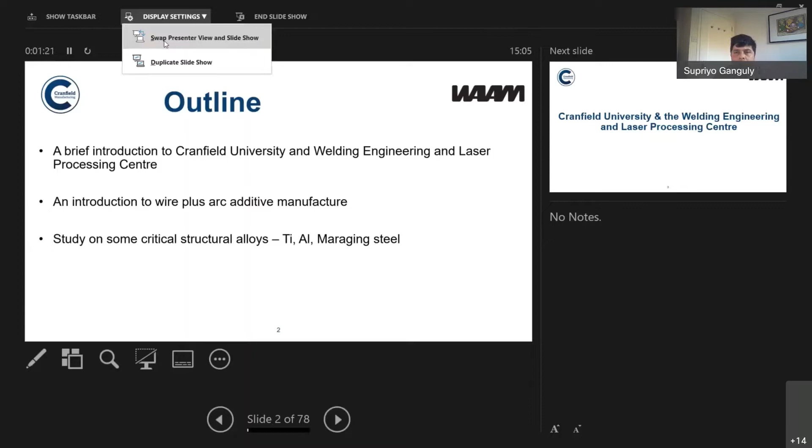Dr. Ganguly, would you mind changing the display settings a bit, so that only the main slide comes up? Great, okay, great, yeah, good, great. Please go ahead. Thanks very much.

The main point I was trying to say is that titanium was being researched for a while now, whereas slowly the importance of this particular manufacturing route is understood in all different sectors, realizing its potential. I will give some glimpse of the work we are doing in aluminium and high strength steel, like maraging steel and others.

Firstly, I will talk a little bit about our university, which is located about 50 miles north of London. It is in a strategically very nice location, in the 'skill corridor' between Cambridge and Oxford, defined by the present UK government as the area where there will be a lot of activities in terms of high or advanced technical research. So we are located in a strategically very nice place.

A slight introduction to the history of Cranfield: originally it was a Royal Air Force base after the Second World War, and it became the College of Aeronautics in 1946. A picture from that time is shown.

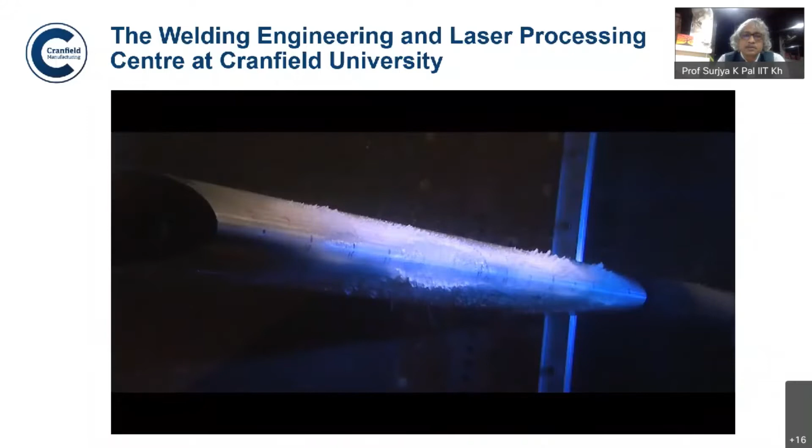So this gives you a basic glimpse of what we do. I hope the sound was audible.

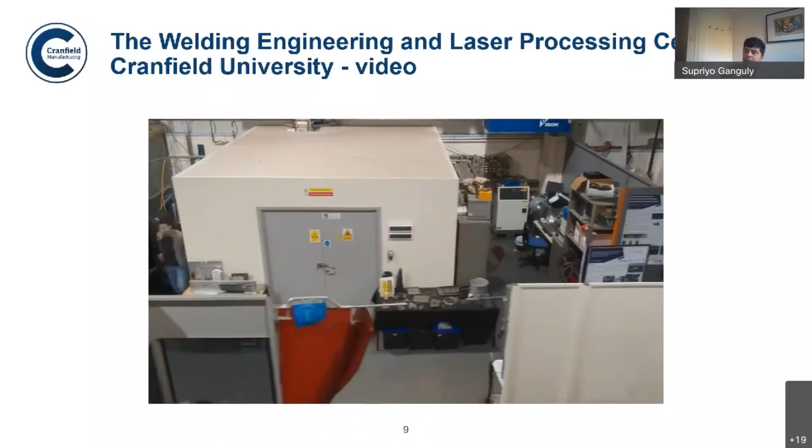So a basic glimpse of the lab. This was filmed by a student using his drone, just to show you the scale of the lab we have. This lab is situated over 700 square meters and is completely open architecture. It's not like we have some particular instrument we use to produce research in one direction, but we set up and manage to do things as we need, depending on the project.

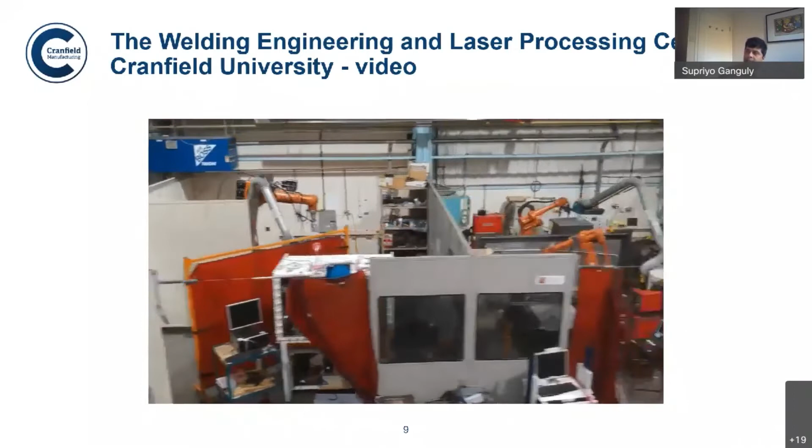In the area of arc welding, laser welding, and wire plus arc additive manufacturing, we are really internationally leading at the moment because of this huge facility, and that brings us very close to industry because we allow doing stuff at a level where industries feel very confident or comfortable.

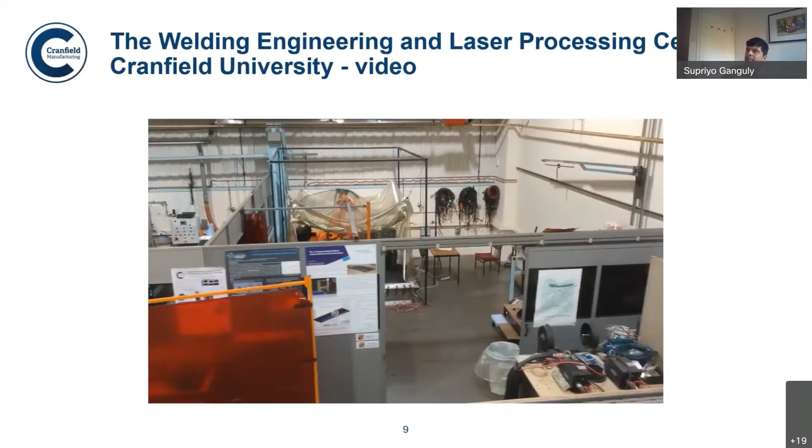So this is a brief introduction to our lab, and now I will start talking about wire plus arc additive manufacture. This is just comparing with what people do conventionally, the sculpting concept. Normally or traditionally, complex parts and shapes are machined out from a block of metal, whereas in additive manufacture we build it layer by layer. This gives us enormous opportunity to save material and do things not quite possible in traditional manufacturing.

Now I will talk a little bit about metal additive manufacturing. Metal additive manufacturing has existed for quite a long time, and traditionally high power density beams are used, like laser beam or electron beam, with a variety of configurations. It can be laser plus wire or laser plus powder, and laser plus powder can be done in different ways, like powder bed or blown powder, and accordingly they have different names or terminologies.

Similarly, electron beam welding also can be done with powder or wire, and powder bed plus electron beam plus wire can produce very fast results—the productivity is quite high, which is known as the Sciaky process.

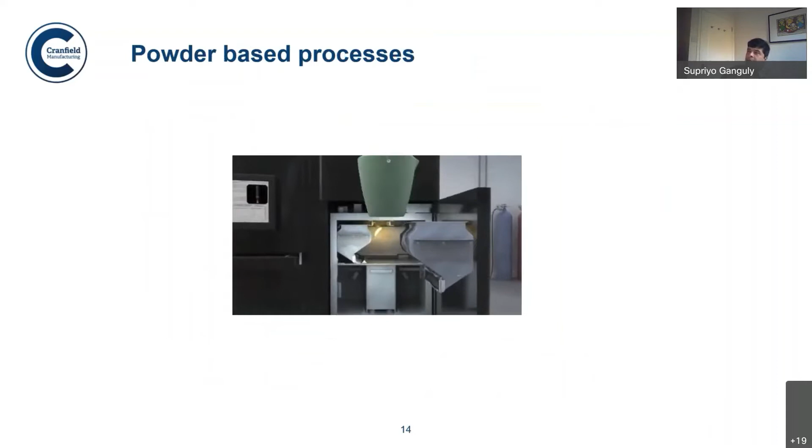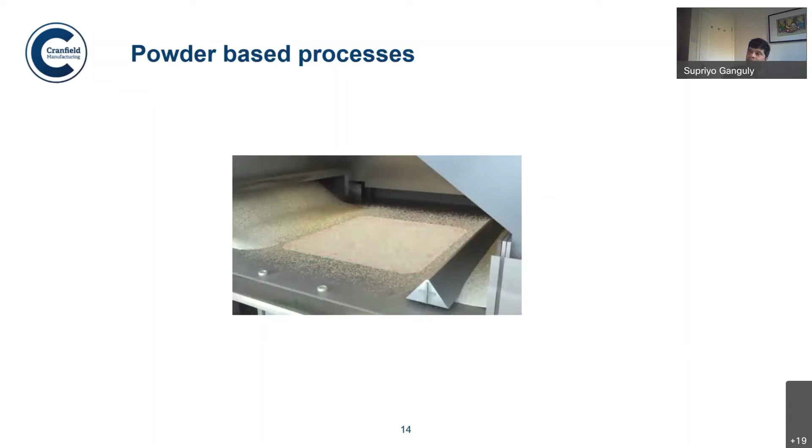This is an example of a powder-based process where manufacture of a turbine blade is schematically shown. You can see we have a powder bed, on which laser will be impinging or irradiating, and the powder bed will be lowered, powders will be fused, and slowly you manufacture what is known as a net shape component—you really don't need to do much machining when we generate such a component.

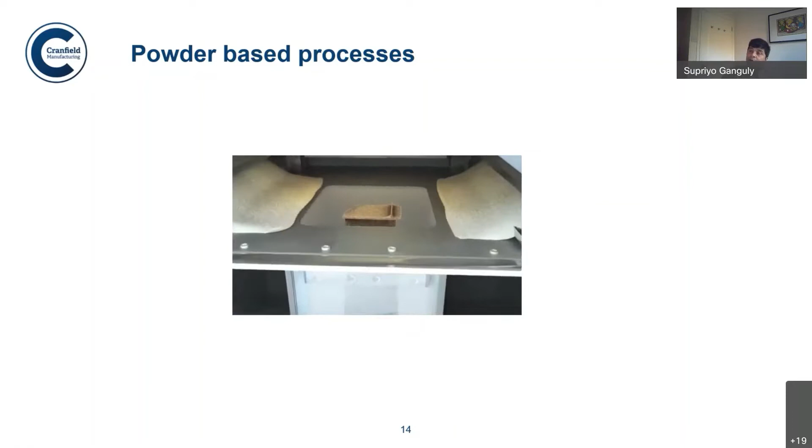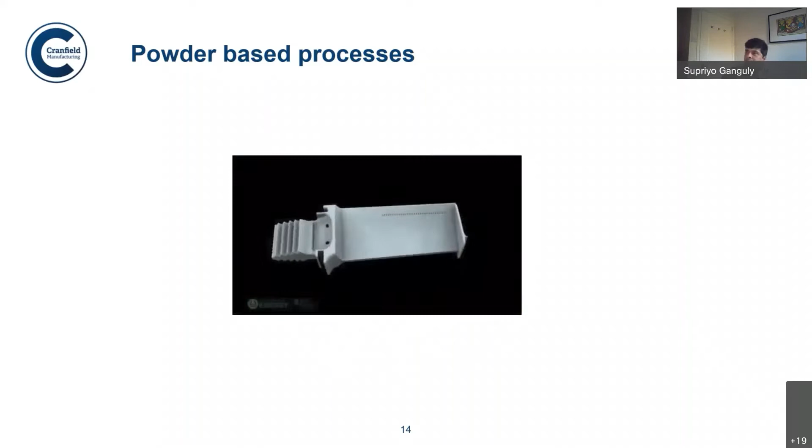So it creates a component which can be readily used. The material utilization can be quite high, although there is loss of powder during the process. After manufacturing, the product needs to be cleaned, where it will be surrounded by powders, and once the powders are removed, you have a net shape of a blade or any component that you are manufacturing.

In case of wire plus arc additive manufacture, it is slightly different. On the left hand top side, an animation is shown of an aircraft landing gear rib, how it is deposited layer by layer, with different strategies. The control of thermal stress is extremely important, and often we do things where the substrate becomes a part of the component.

As you will see on the right hand bottom side, we are not making two components, we are making one component, but we are flipping the neutral axis of the component in a manner that the substrate on which it is built becomes part of the main component.

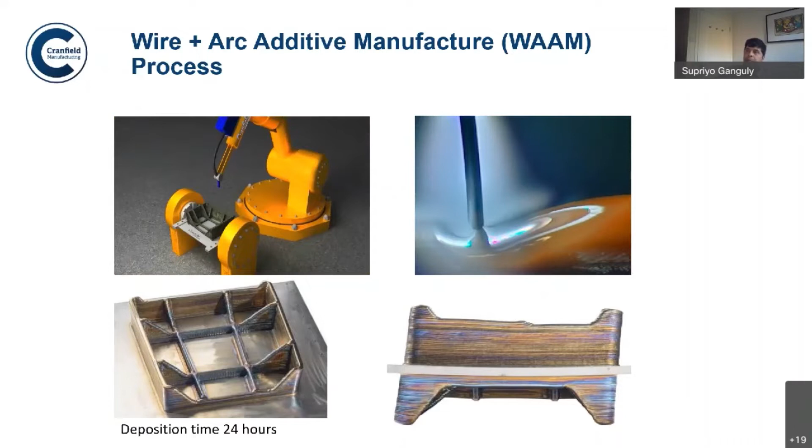On the right hand top side, a plasma arc is shown, how the material is fed, and on the bottom side you can see a proper component which was manufactured, made of titanium.

A lot of work has gone into understanding this process, and the next few slides will talk about that process. But before that, just to give you the scale of saving that you can do.

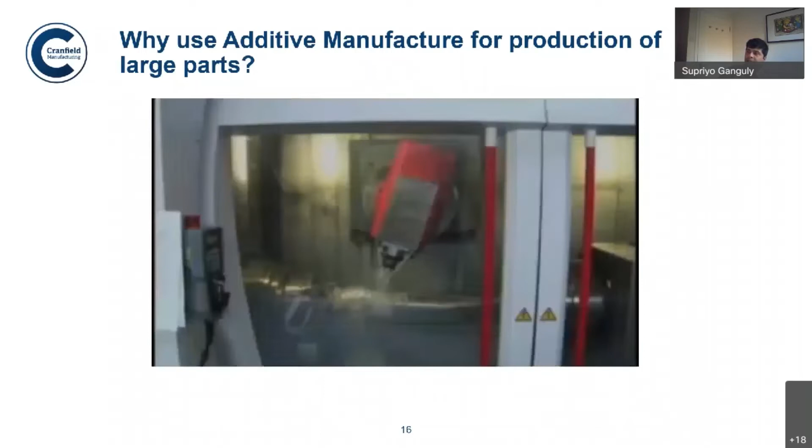In a traditional process with a billet and machining out all the material, it will be extremely expensive, because the cost of titanium can be quite high in its rod state, while the cost of scrap titanium is practically nothing. So basically, it's a huge amount of material saving that this manufacturing route offers, which makes it so attractive to all the high-end manufacturers where people use titanium.

And needless to mention, titanium machining is a very difficult process—it is not straightforward like aluminum. So from that perspective also, it is a fantastic process for titanium.

As I said, initially most of the research was funded by people who are planning to use titanium into their product mix and want to have a process which gives the best yield and lower material wastage.

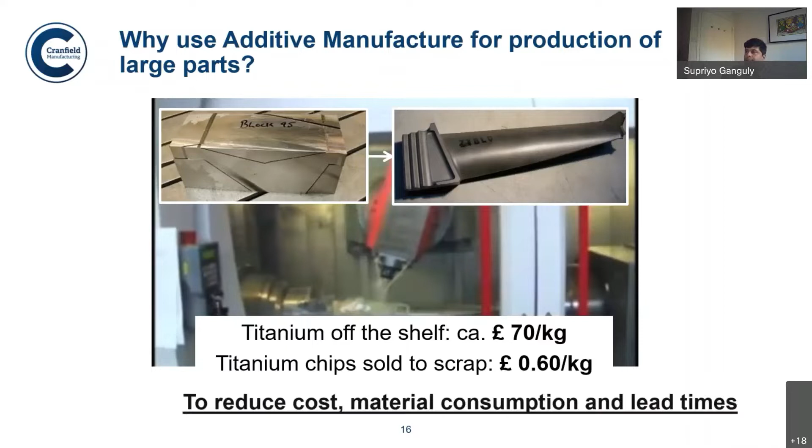So I will talk a little bit about the different structural alloys that we are studying now. Just to give a brief context, wire plus arc additive manufacture basically relies on successive deposition. As you can see in the components, we call it near net shape. It is not a net shape component because you need to do machining before it can finally be implemented.

However, the process itself results in several thermal cycles. When a layer is deposited, as we keep building, it will have several thermal cycles, and it would obviously depend on the geometry of the deposition and how much energy input is going through each layer. This will result in a differential thermal profile in a component, depending upon whether a layer was deposited at the beginning or towards the end. It will have quite different properties, which I will show you in some of my work.

Also, because it is cooling from a liquid state, it will give segregation of solute atoms, which will make it even more complicated for heat treatment, because for age hardening alloys, solutionizing is a step before we go to the aging process, and solutionizing might not be very smooth or uniform throughout the whole component if there is a lot of segregation.

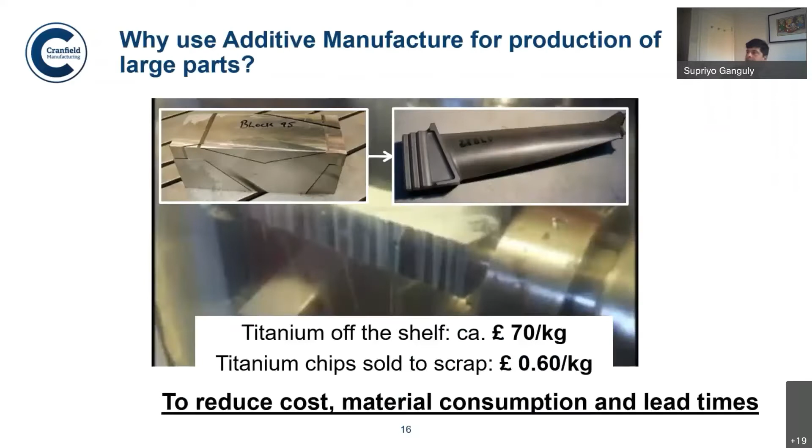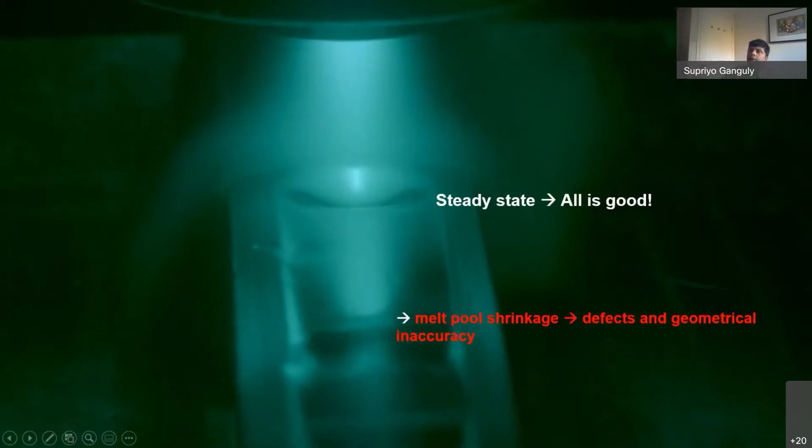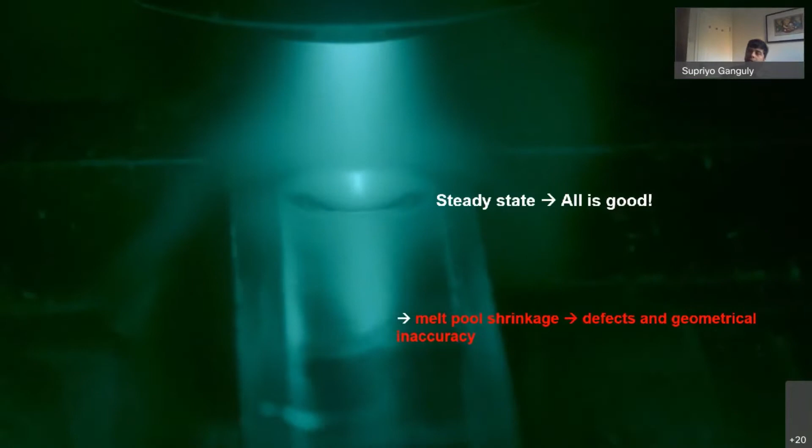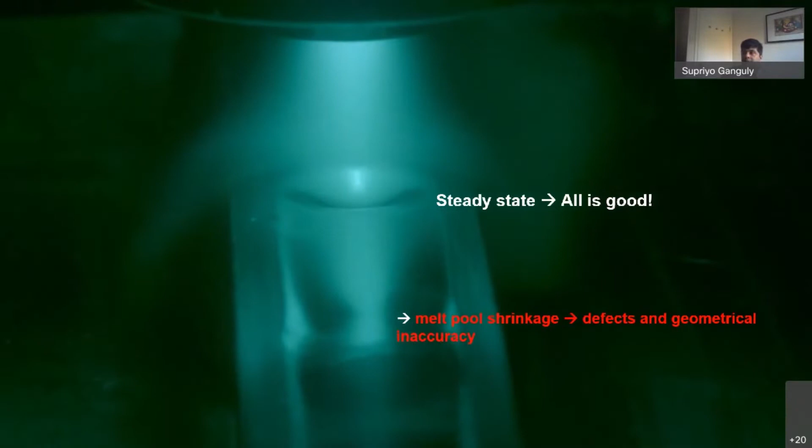This is an example of the process, showing how the weld pool changes when it comes to a junction, or a place where the thermal mass is very different. At steady state everything can be quite nice and good, but one of our areas of expertise, where we made significant progress, is understanding how to deposit when the thermal mass changes. As you can see, when the weld pool shrinks because the thermal mass is larger, it will definitely generate defects and geometrical inaccuracies. This is an area we are focused on quite heavily and studying.

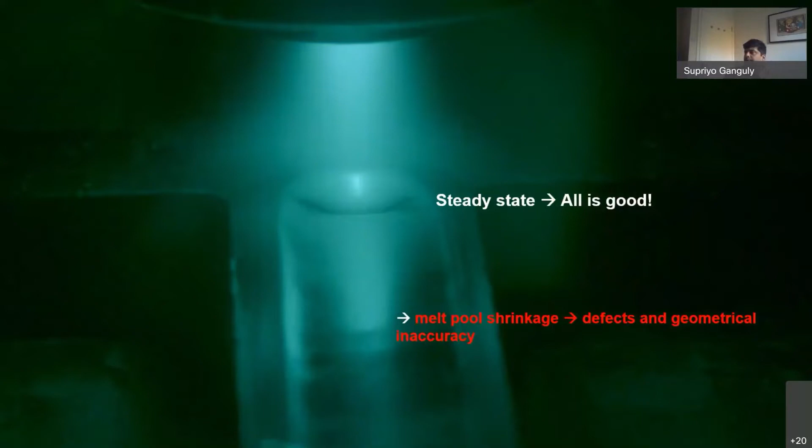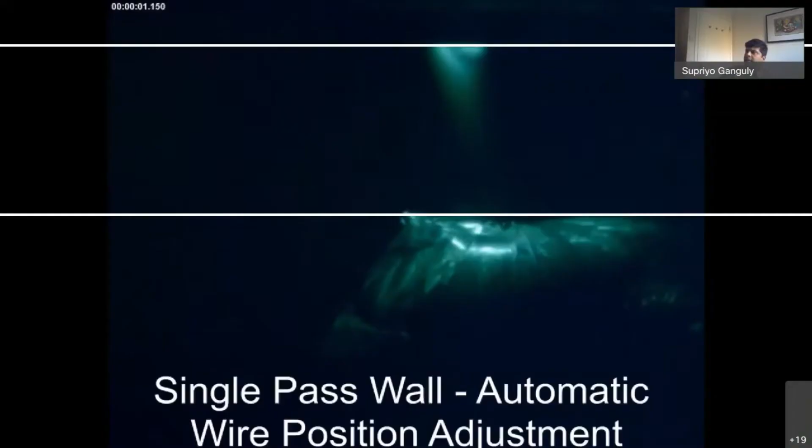This is a change in thermal field near the intersection, which needs compensation. This is another example of the work we are doing. This is a single pass automatic wire position adjustment. As you see, the surface tension of the weld pool changes as it progresses, and it is quite normal, because as it moves there is heat accumulation, and as a result the temperature of the weld pool changes. In this example, we are trying to show that we have developed processes through which the distance between the wire and the relative position of the wire to the arc remains constant throughout a deposition process.

So these are the different areas of process studies that we have performed, and generation of components really needs a very clear understanding in these areas.

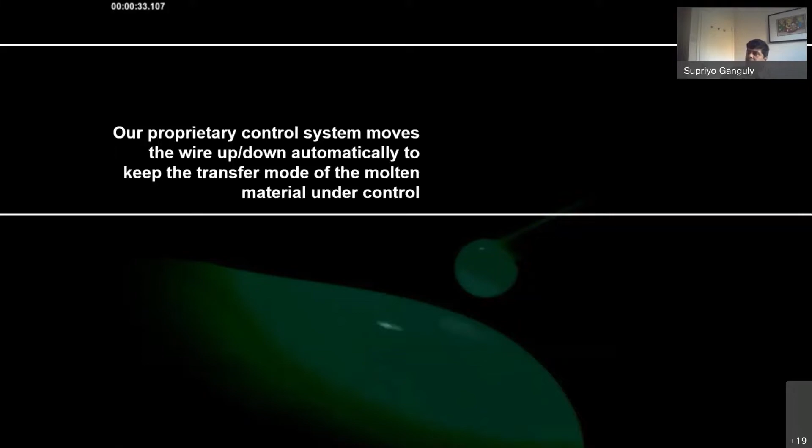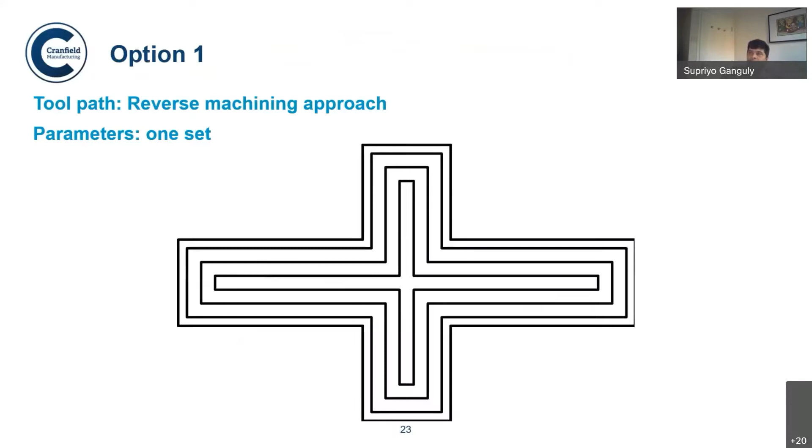This is option 1. It is just like a reverse machining approach. We start building from the middle, and slowly it goes out, using the same parameter set throughout. Now you can see the component, which is completely riddled with defects, and the layer height is completely inaccurate.

It is because the thermal mass of the depositing mass is continuously changing, and unless this is addressed, it will never be able to generate a structurally sound component.

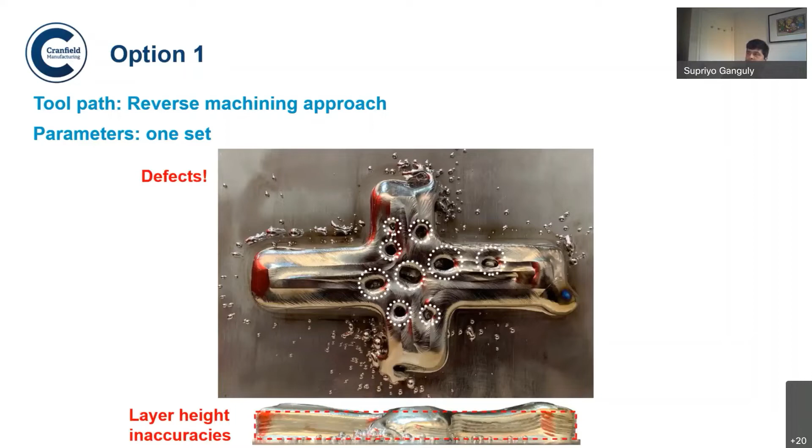Now this is the other part, the final part building, which was done here, where we managed to rectify all these defects and all the resulting parameters and defects.

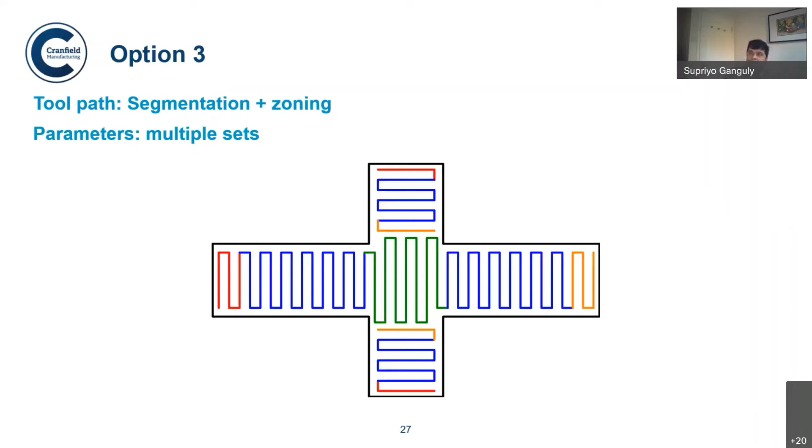Here it is showing segmentation and zoning in the toolpath. The different colors show that the speeds are changing, and multiple sets of parameters are used. Once this was done, it managed to create a completely sound cruciform with target layer height in every aspect of the deposit.

However, the thermal effects can still be seen at the edges, as you can see here.

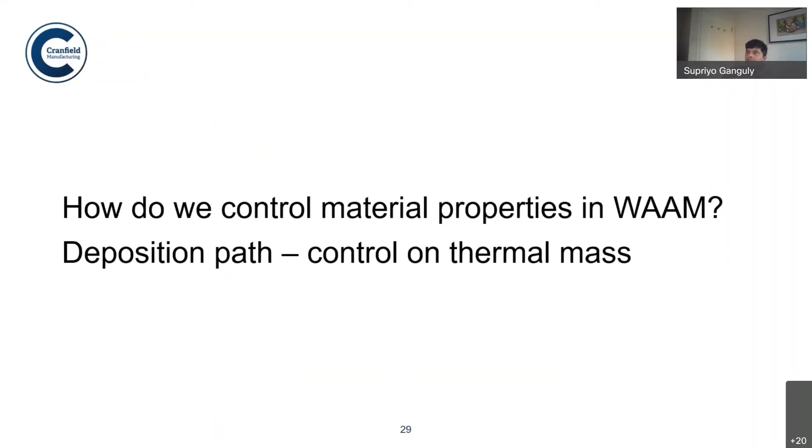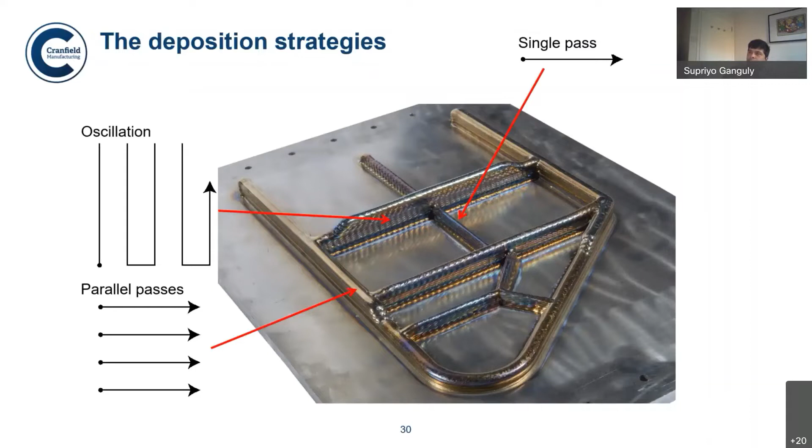So how do we control material properties in WAAM? Through deposition path and control of the thermal mass. Here I would like to show the same slide again, to recapitulate the single pass, parallel pass, and oscillatory deposits, as you can see here. The next slide will show the resulting mechanical properties coming from these.

However, all of them are quite low when we consider a wrought alloy plate of this particular alloy. We are talking about titanium 64, which is probably the most used titanium alloy in the titanium family of alloys.

A detailed microstructural study was carried out, which I'm not going to discuss here, but I can guide you to the different papers at the end, which show the reason for this variation, where the thickness of the alpha lamellae - titanium 64 being a two-phase alloy where most of the part is alpha with a small amount of beta - and the size of the alpha colonies are responsible for the differential strength generated in the different building strategies.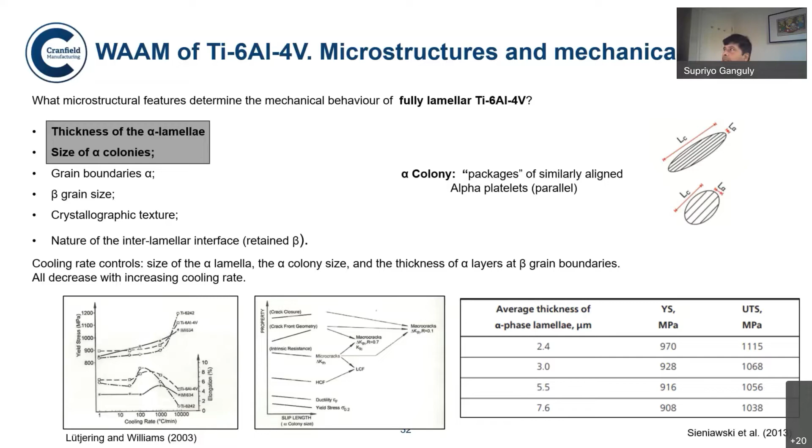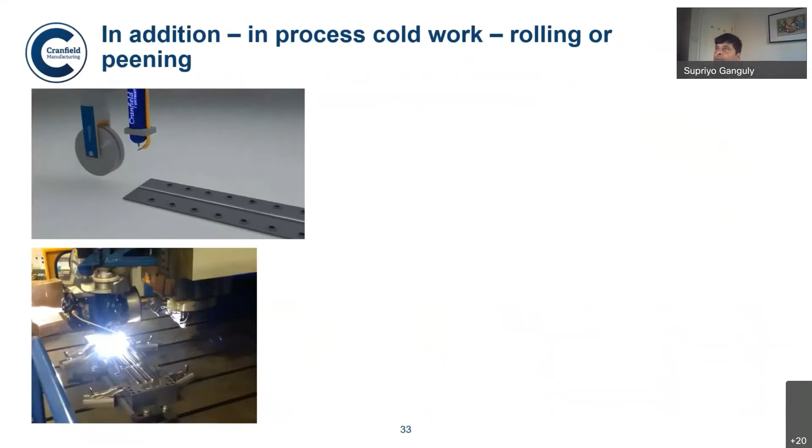So in titanium, what we are doing, titanium 64 is a fantastic alloy for this purpose. The top left-hand slide shows the rolling process we are adopting during generation of this kind of part, and the bottom one shows the actual structure building that was done in this study.

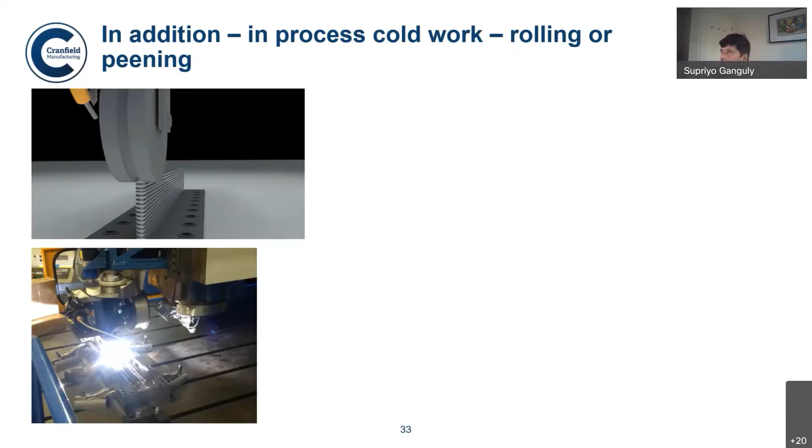This wall, if you can see my mouse, shows the large epitaxial growth of grains, and the EBSD image is shown in red on the right hand side. When we roll it, we can vary the rolling load. With 50 kilonewton, this shows the prior beta grain size generated at high temperature, which then resulted in the alpha grains. Comparing rolling at 50 and 75, there is a significant reduction in prior beta grain size. So it is possible to control the grain structure of such deposits through application of cold working.

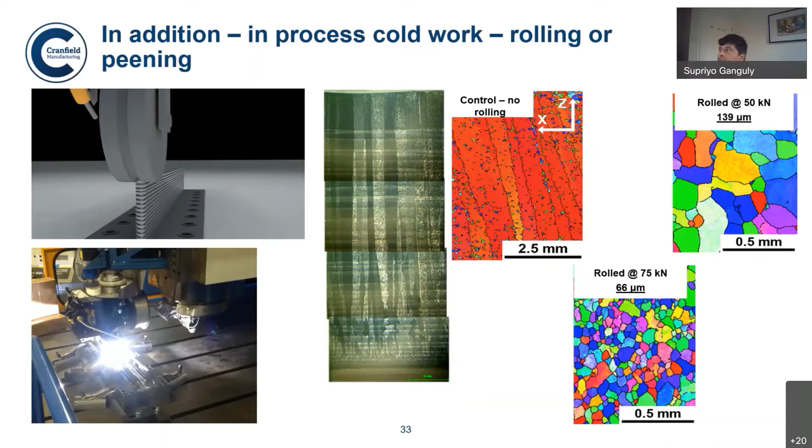This is the kind of work that makes it possible to bring this technology close to the manufacturers, because it is possible to get strength close to the wrought alloy. So this is now what I will be showing.

This shows different types of rollers we tried, profiled and flat, and you can see the different levels of grain refinement achieved as compared to the extreme left-hand micrograph, which just shows dendritic epitaxial growth of grains.

Now I will talk about the directionality or anisotropy you see when the grain structure is completely aligned to the deposit direction. Going back to the previous slide, on the left-hand side micrograph is the strength shown in the filled and empty black circles, where you can see a very significant difference between the two directions.

The vertical is always lower compared to the horizontal, with a significant difference between them. Now, when we roll it with 50 kilonewton, the differential strength between the two directions is quite less. And when rolled with 75 kilonewton, as you can see on the top side, it not only exceeds the wrought alloy strength, but the anisotropy is more or less eliminated.

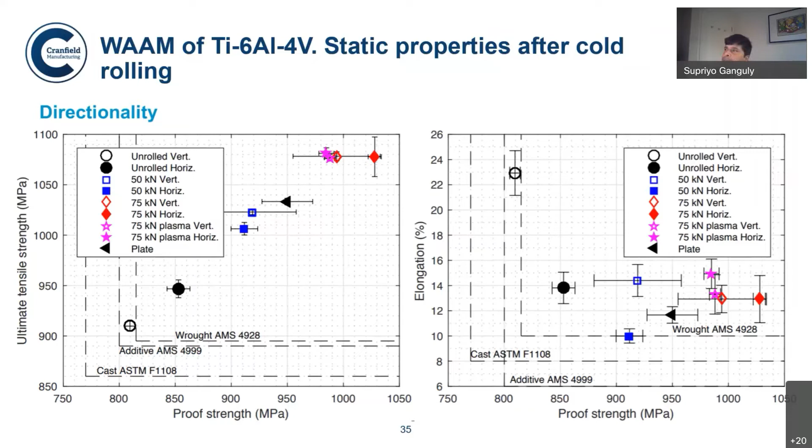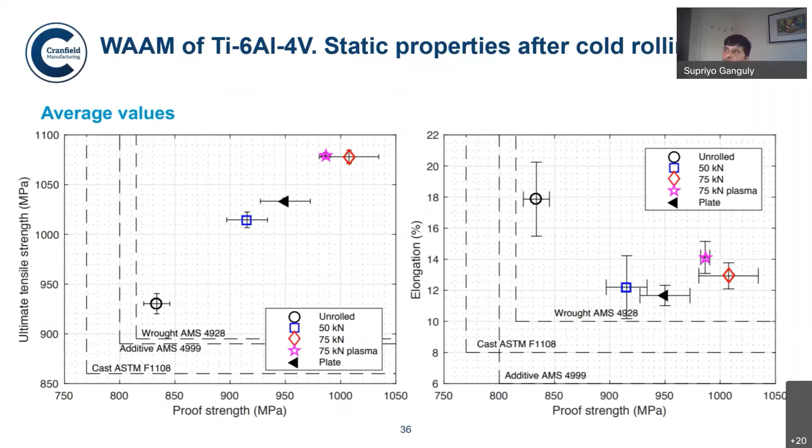This shows the average values of the two sides, and as you can see, the 75 kilonewton rolling is basically even with any process. Two processes were studied, plasma and TIG, and both generate strength higher than a wrought alloy. This is one of the areas I'd like to highlight, how the static properties can be controlled in the additive manufacturing process.

The next area I'd like to talk about is control of composition. Additive layer building gives us the unique flexibility of adding materials as we like.

This particular work was done by one of my students a few years back. Here we added tungsten carbide powder into the melt pool. This was done by a GTAW process, adding wire and also powder, which gives us a composite structure like this, very much acceptable to the industry I was working for at that time, from Cranfield. So this is the kind of structure that was produced.

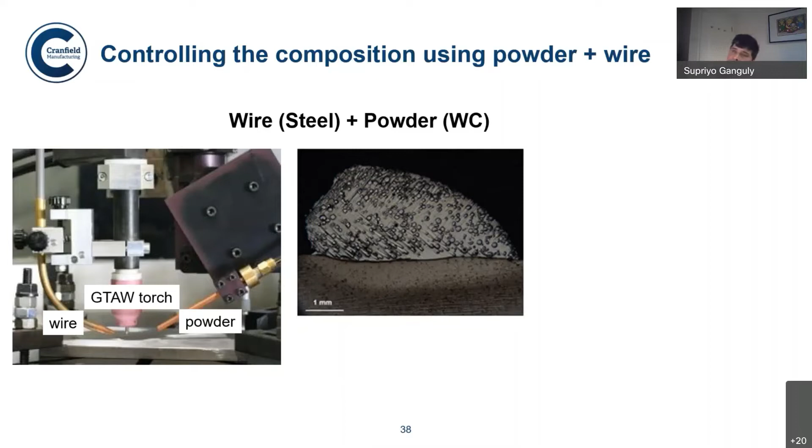This particular application was in railway brake discs, where two properties are extremely important: thermal conductivity and abrasion or erosion resistance. When a brake disc engages with the clad, it generates a lot of heat, and unless it is quickly carried away, it will deform. Also, particularly in an emergency situation, it causes a lot of frictional force at the interface, and as a result can wear out pretty quickly. Tungsten carbide will probably give us strength to lower the erosion behavior, or lower the material loss.

So controlling composition with a multi-wire approach. This work was also done by one of our students a while back. This was basically the root of it, the first seed project we can say, from which we had this concept.

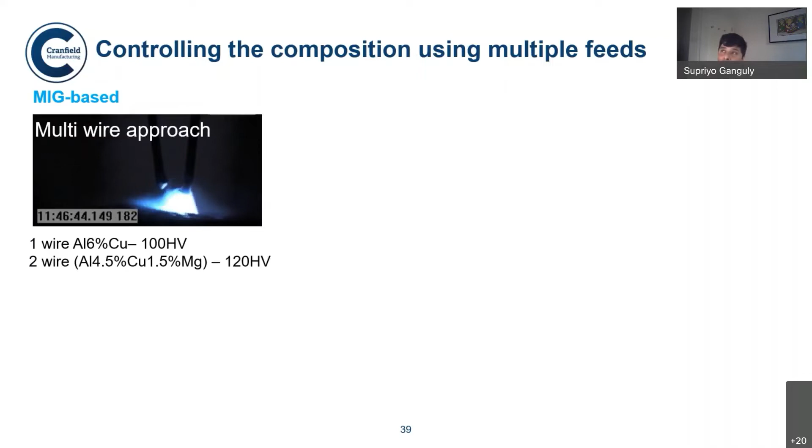He added multiple wires in order to avoid solidification cracking, because in some aluminum alloys solidification cracking becomes inevitable due to the solidification path and the phases that form during the process, resulting in a huge solidification range. So this multi-wire approach was done to get rid of that large solidification range, or rather to modify the solidification path so that the range becomes very small, and therefore avoid solidification cracking.

This work was then taken forward with the addition of a third wire, because in that case we can have a deposit which is as strong as probably the parent metal. This is one of the major issues in aluminum, that the weld metal and the associated heat affected zone have quite low strength compared to the parent metal.

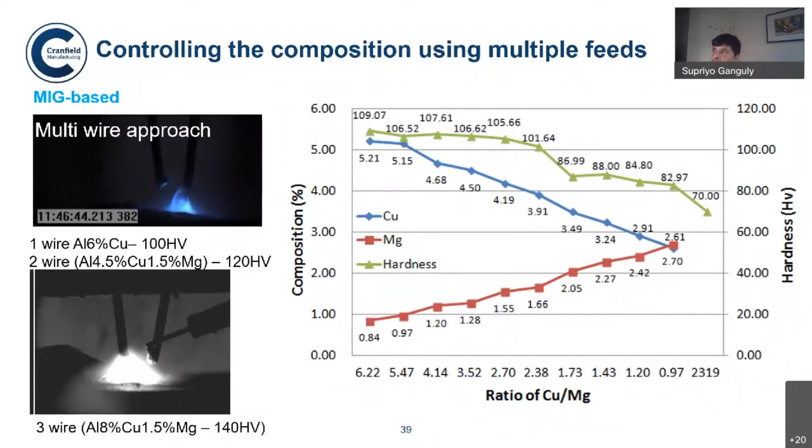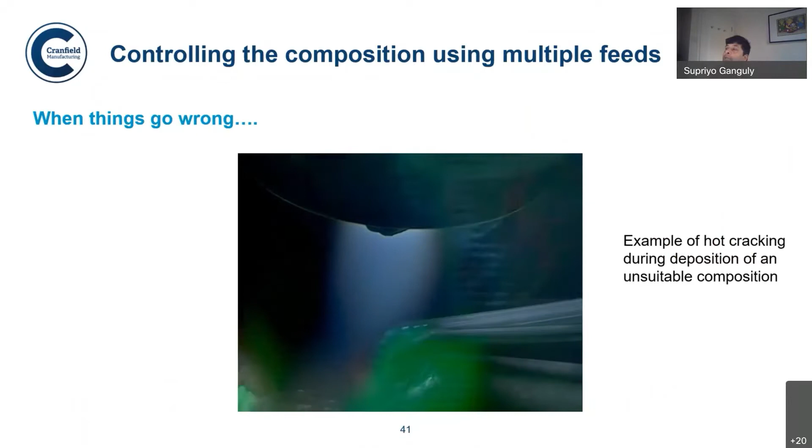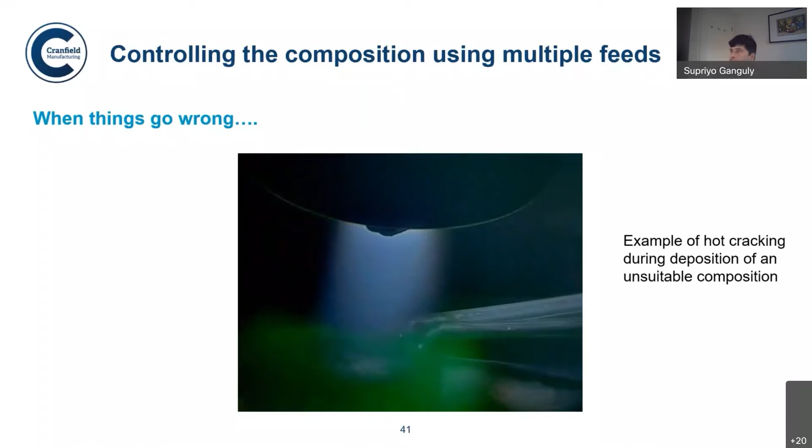This is now being controlled by adding several wires, and this principle is taken for development of additively built aluminum parts. So you can see here that wires are being added, but this is an example where it goes wrong. You will see that there is crack formation that happens during this process. Whereas when things go right, it can be quite nice actually.

Then the deposit can be built with a lot of integrity, without much formation of cracks or internal defects in the deposit.

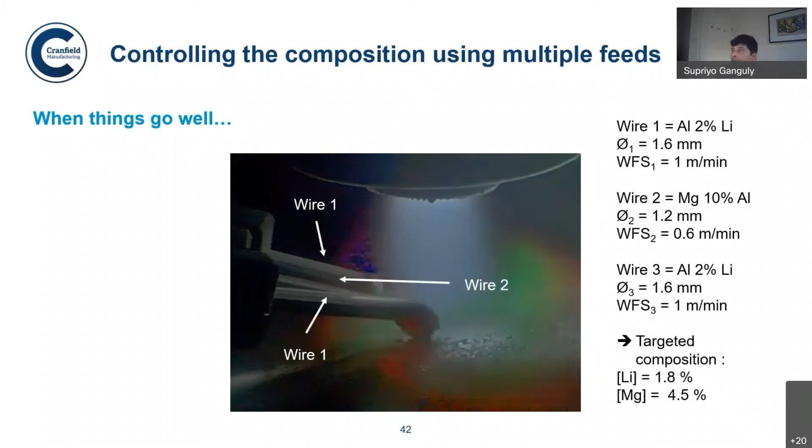So you can see here that we are trying to mix aluminum lithium with aluminum magnesium, and the target composition is shown here, that we wanted about 1.8% lithium and 4.5% magnesium.

This is being tried because we found that the aluminum magnesium lithium alloy family can give relatively low density, and lithium increases the specific modulus quite significantly, which is Young's modulus divided by density, and that is quite high when we have lithium in the mix, and potentially insensitive to pre-stretching and quenching rate, which is enormously beneficial for AM.

If we know the different weight percent composition of the wire, we can generate a target composition by controlling the feed rate of the different wires. This is basically exemplified in this particular work. These works are done to research how the composition can be adjusted to get an optimized composition for a particular type of application.

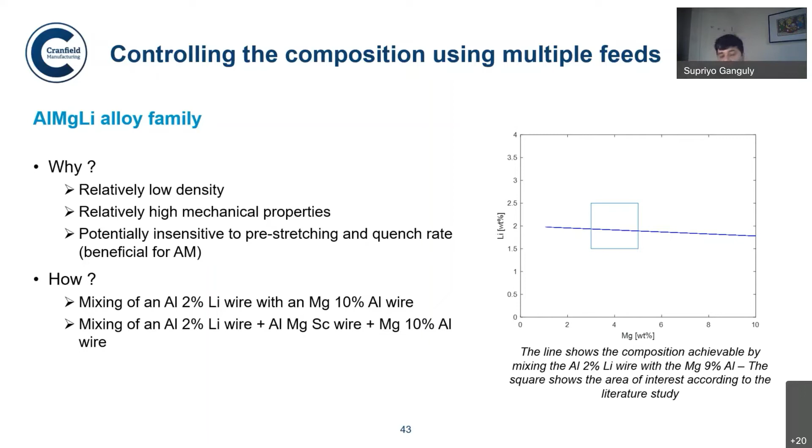Then we work with different wire manufacturers, so this type of wire can be manufactured to a specific chemistry, so that we don't have to mix, and in practical applications you can use a relatively straightforward process in order to generate a deposit.

We are also now trying to develop aluminum copper lithium magnesium alloys, which will reduce solidification cracking sensitivity and give relatively high mechanical properties. Copper is added to reduce the solidification cracking behavior and tendency, and magnesium will generate sigma phases, or omega phases, which are quite important to improve the mechanical properties.

It generally doesn't get overaged. One of the major problems with aluminum alloys is overaging while you weld or do any kind of processing with thermal energy. This particular phase is quite strong, and it tends to overage quite a lot less actually.

So how can it be achieved? It can be achieved by mixing the 2395 wire, which is magnesium 9% aluminum, with 2319 and aluminum 2% lithium wire. These are the tentative compositions that can be achieved with different wire feed speeds, shown on the right hand side.

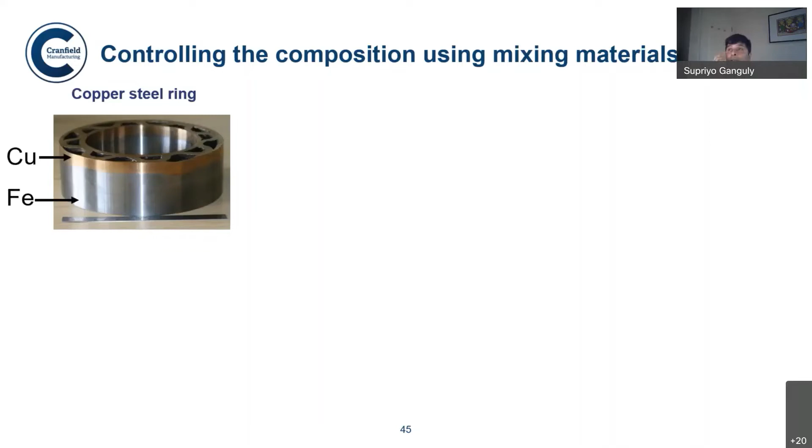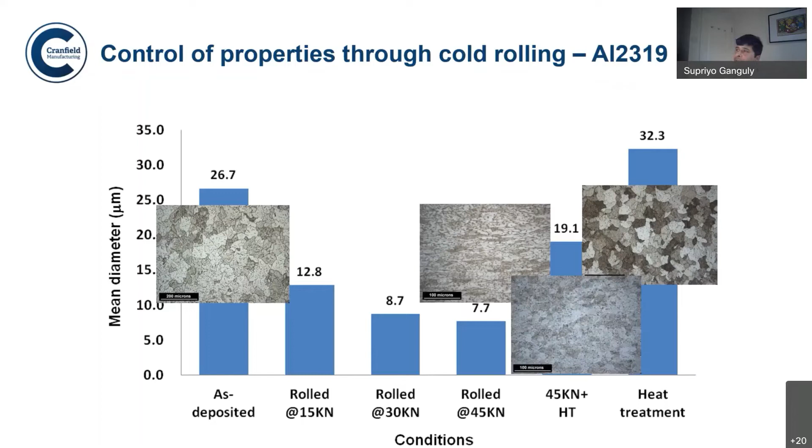These are the different grain structures that you can obtain. With only rolling, you can have pancake shaped grains, but after heat treatment it forms an equiaxed structure. This is a very interesting observation with aluminum.

However, when we do artificial aging directly without doing any cold work, then also you can achieve a similar level of strength. This is a very interesting observation, as you will see in the next alloy that we have studied.

I will show you that it will be very difficult to get the same thing in maraging steel. Therefore, of course, it depends how the aging process works, or what are the characteristics of the precipitate in the aging process, that actually determines whether it can be achieved directly through aging, or you have to go through the cold working process.

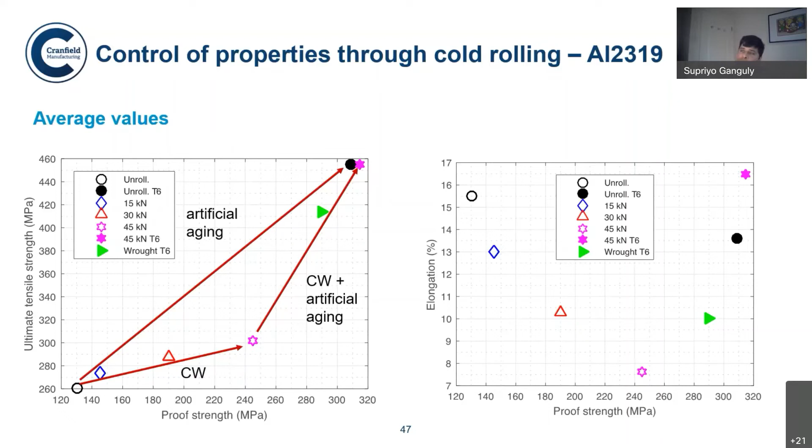However, cold rolling can be extremely important to reduce porosities and other sorts of defects that normally accompany aluminum deposits. A cold roll structure also generates much better ductility or toughness as compared to a directly aged alloy. So in those respects, cold rolling can be a very important aspect that should be followed in aluminum alloys as well.

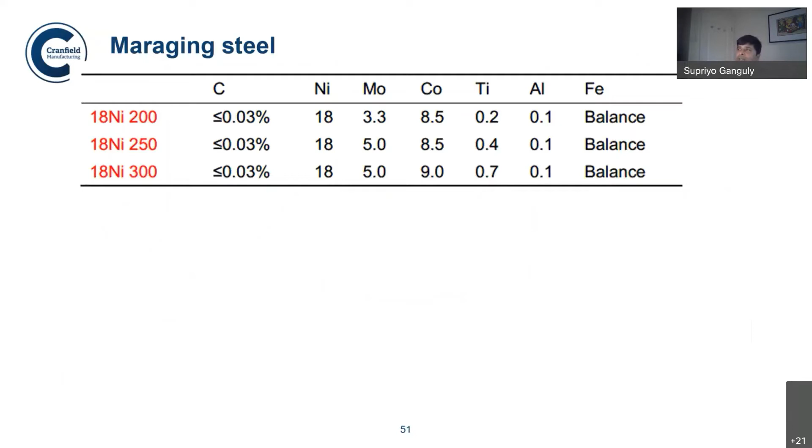So I will talk a little bit on the maraging steel study now. Material properties: there are three grades of maraging steel generally available in wire form, and you can see here that there is a high nickel steel with basically moly and cobalt in its mix.

The moly is basically primarily responsible for forming the age hardening, because maraging steel is a very clean steel. The carbon is almost close to zero, much less than 0.03%. So carbon doesn't impact or influence the strength of the martensite, basically.

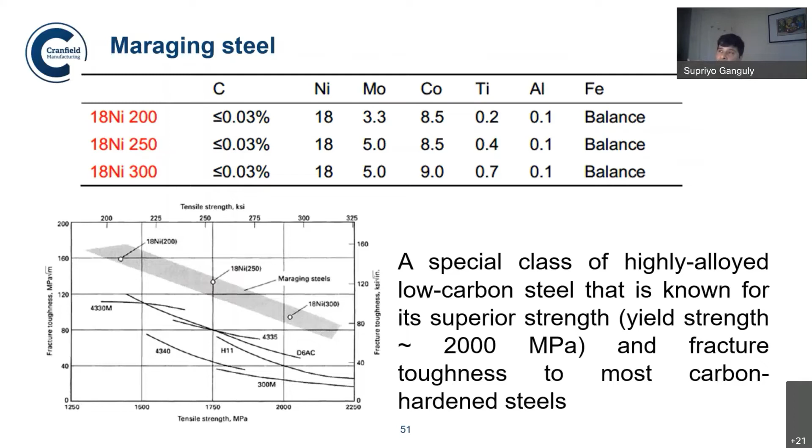So when this maraging steel is formed, at normal cooling it generates martensite, and the strength is quite low actually. Then when it ages, it forms precipitates like Ni3Mo or something, and that gives the strength. This material can generate tremendous amounts of strength, and because of the nature of the precipitates, it generates quite isotropic strength - I mean the strength is not dependent on direction, because the precipitates are quite spherical in nature, I would say.

Just a little bit about this alloy: molybdenum is the main hardener, and it hardens the matrix through formation of Ni3Mo kind of structure, whereas titanium is a secondary hardener. It also forms Ni3Ti, and with further aging, Ni3Mo is dissolved and Fe2Mo also forms, which also adds to the strengthening behavior.

Cobalt was alloyed mainly to lower the solubility of molybdenum in martensite so that it can age efficiently, and the coherency strength of this type of alloy restricts the growth of Ni3Mo type precipitate. These are a few physical metallurgy bits that are important, and also what matters in this particular composition.

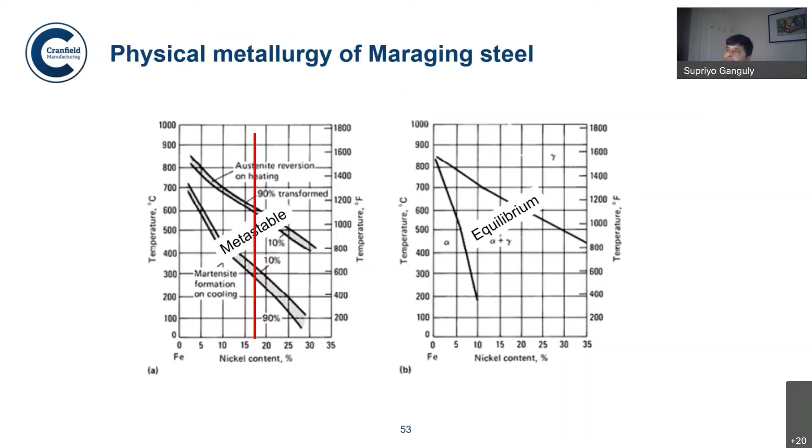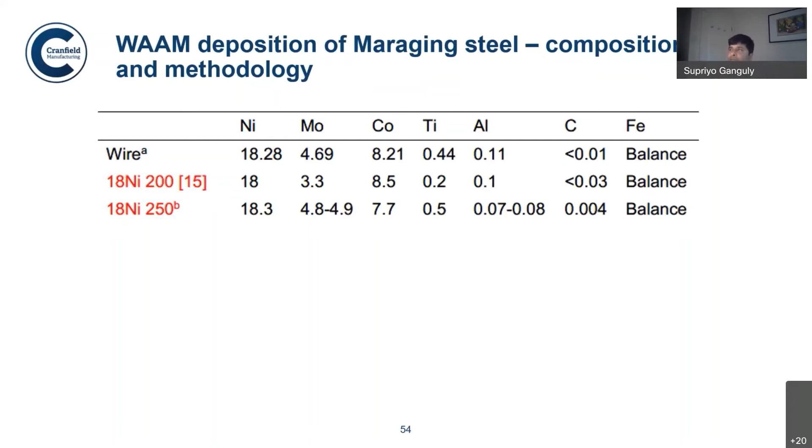We called it Huntington shielding, which we developed through some of our suppliers in UK. It's basically a large tent, a kind of polythene plastic polymer built tent, and it can be inflated with argon. It acts like a glove box where there is access to this kind of setup if you want to change something.

It is very important in this, because you cannot really build such kind of structure in normal environment, because the scale formation or the oxide formation while you build will be tremendous, and that will change the surface tension of the weld pool and will impact how the scale will be either entrapped within some part of the metal, which will increase the strength but reduce the ductility tremendously. There will be a lot of influence on the property if it is done in normal shielding, which is beyond the control of an operator.

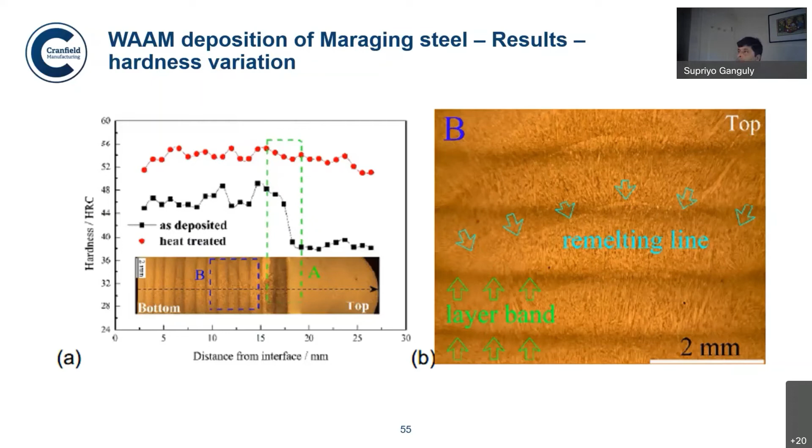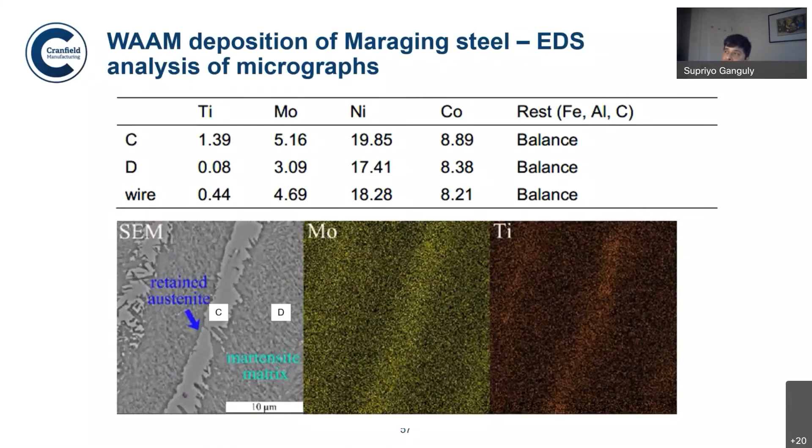So some SEM work was done to understand why the aging response is not as good as, say, aluminium, because these are quite heavy atoms and their diffusion is not quite straightforward.

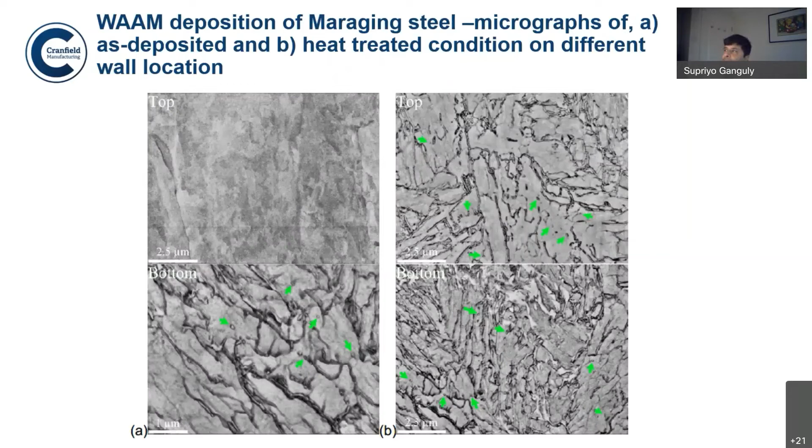So now I'm showing on the left hand side the two micrographs. The left hand side top one is the micrograph taken from the top in as-deposited condition, and the bottom one is from near the bottom of a deposit in as-deposited condition. The right hand ones are the same thing after heat treatment, and it is showing some amount of precipitation after the heat treatment, and that's why the hardness has jumped up.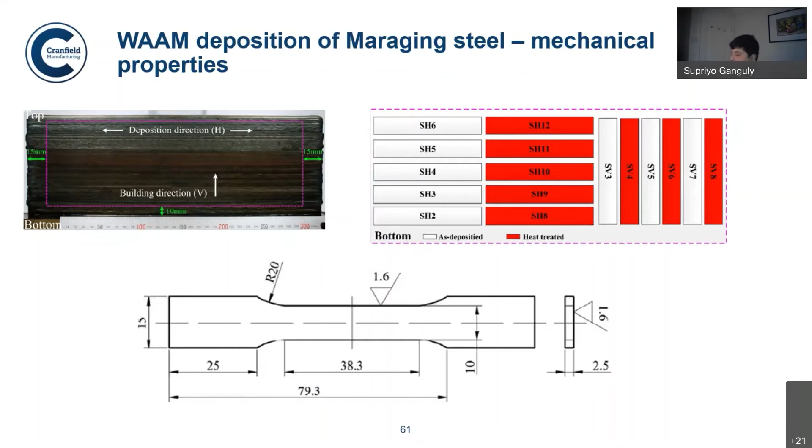The red ones are heat treated, and the other ones are in as-deposited condition, and we have done this to cover the entire length of the wall or the build direction and also vertically. Now this is the kind of - the left hand side is the horizontal tensile strength results, and the right hand side is the vertical ones. As you can see here, the heat treated ones have gone up quite significantly strength-wise as compared to the as-deposited ones, which is quite expected.

However, it never achieves 100% of the wrought alloy strength. It is like if the strength is 1700, it is coming to about 1500 or so. So in as-deposited and heat treated condition, this alloy fails to achieve the maximum or optimum strength, and here we have averaged out - in this particular graph we are showing the elongation, and it can be seen that with the heat treatment the elongations are primarily reduced, or the area under the tensile curve is reduced.

So this is basically shown here, and you can see here the different strengths that are mentioned. In as-deposited condition, the horizontal is 1118, and as-deposited vertical is quite low compared to the horizontal, which is quite expected. Actually we found them like this.

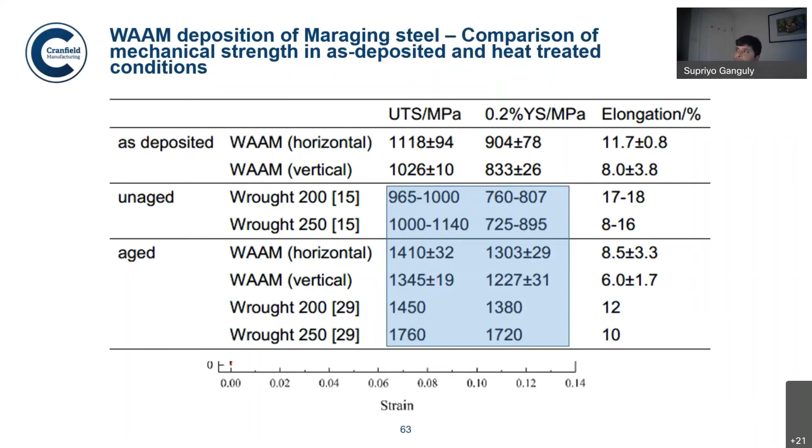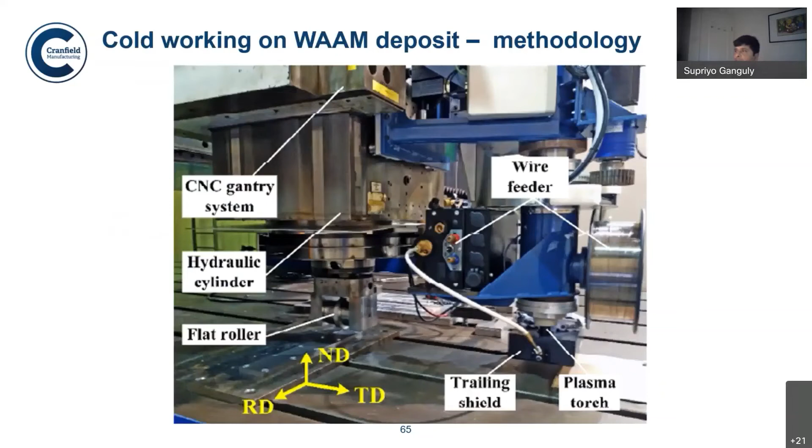So now we have done some mechanical working, similar to the previous ones. This was done with a flat roller in our CNC gantry system, which is now removed with another new rolling unit. We have done interpass rolling, so every pass deposited and then rolled, and this is showing the impact of the rolling.

You can see here the unrolled horizontal and unrolled vertical, shown by red and blue marks. Take these triangular ones - 50 kilonewton aged horizontal and vertical - it has now achieved a level close to the wrought alloy, shown by the green star. The empty circles, red, green, and blue, are basically the as-deposited and aged ones.

So what I'm trying to convey is that cold rolling is an extremely important tool in order to allow the matrix to be solutionized properly, and therefore its aging response increases tremendously.

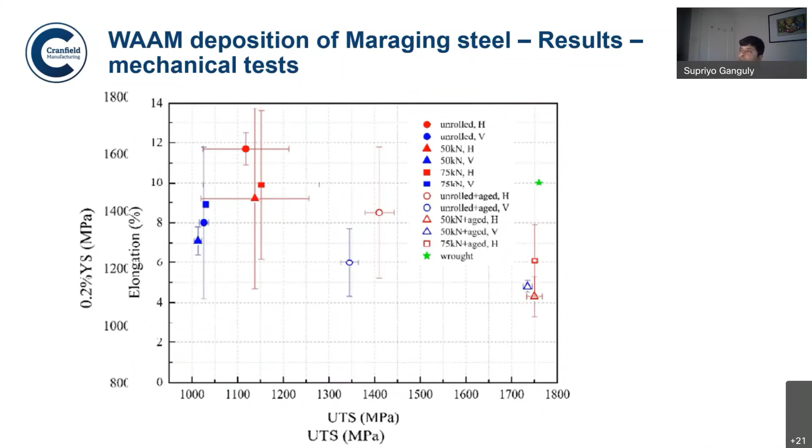So now I'm showing you the result of the work. You can see here the rolled with 50 kilonewton or 75 kilonewton both have very similar effect actually, and here we have achieved strength of 1750 and 1751, which is practically identical to 1760, and therefore it managed to get the same type of strength as the wrought and aged alloy.

This is some further microscopy work that the student had done, just to show that the rolling generates dislocation clusters which help with the next layer deposition. It then allows formation - I would not say recrystallization, but at least partial reformation of the grains, which are quite effective in achieving the solutionization required afterwards during heat treatment.

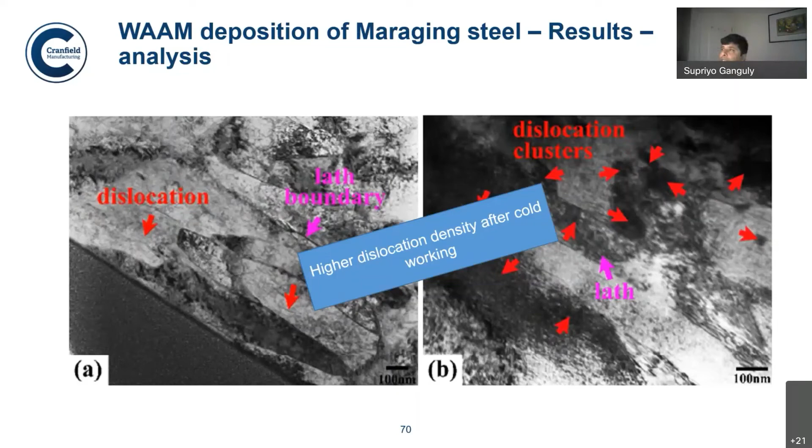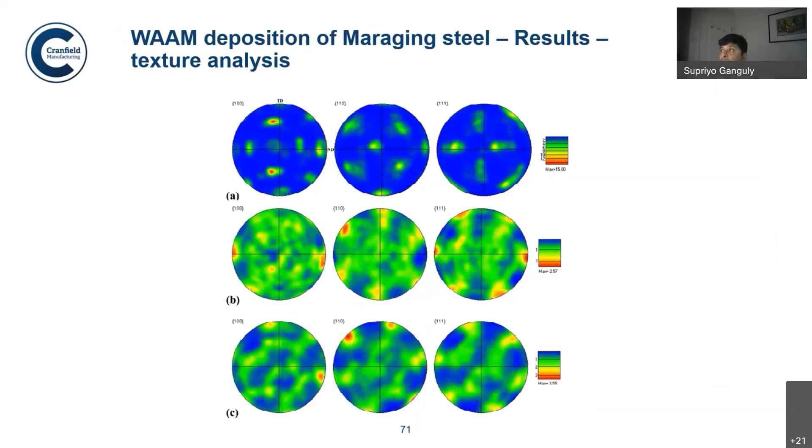So these three figures are showing that if you see the top one, the intensity of the texture is 15 times the random texture, whereas the bottom ones show that with different levels of rolling, it is now reduced. So basically the alloy is becoming much more isotropic and without much texture.

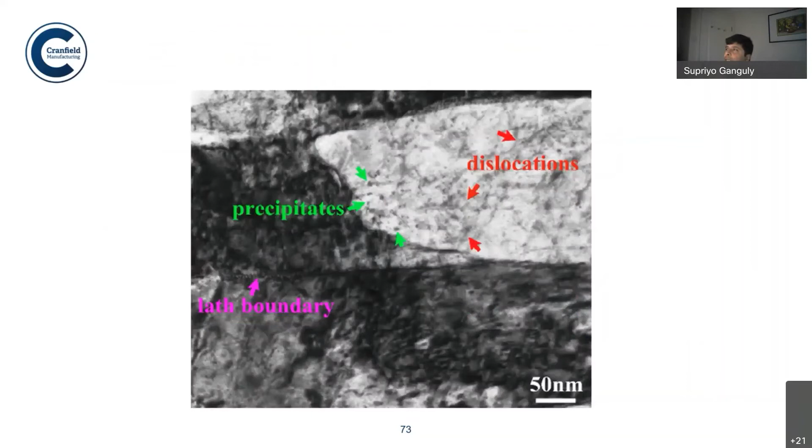Okay, so that is bringing me almost to the end of the presentation.

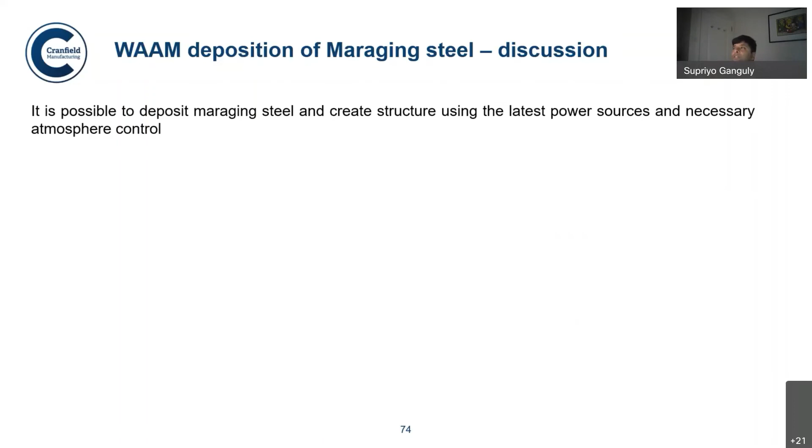This work is quite significant towards the development of WAAM as a very important tool for manufacturing of high-end alloys. It is possible to deposit and create structure using the latest power sources and necessary atmosphere control, following the principles of precipitation hardening. The as-deposited structure showed hardness and strength in between the solution - so you can age the as-deposited structure, but you never achieve the maximum strength that you can with rolling.

We identified that the lack of high angle grain boundaries and lack of dislocation density are not conducive to solutionizing the structure to the extent possible with rolling. Cold working gives the necessary grain structure reformation and introduction of high angle grain boundaries, which allows proper solutionization and thereby much better response during aging.

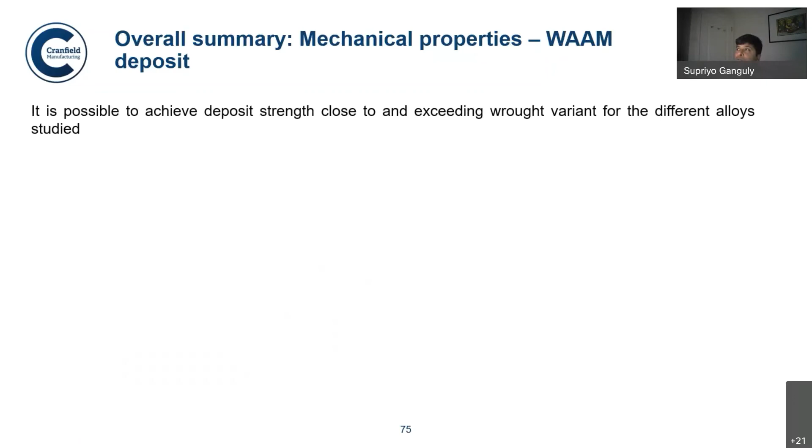Overall, it is possible to achieve deposit strength close to or exceeding the wrought variant of different alloys. Segregation and epitaxial growth in this manufacturing process is an important issue, and interlayer rolling could be an effective tool.

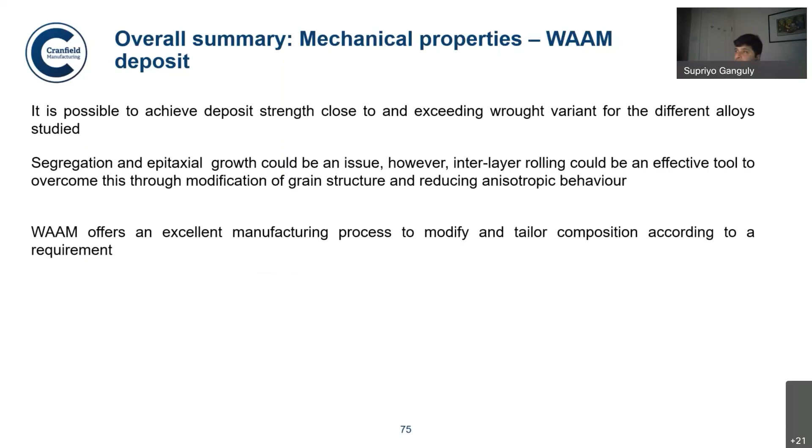This manufacturing technique, WAAM, offers excellent flexibility towards modification and tailoring of compositions. So design of the deposition process is important to address the difference in thermal mass, and this matters because the microstructure and mechanical properties are inherently linked to the thermal profile of a deposit.

Here are some of the references that were published from these works, and we are still publishing and doing a lot of study in this area.

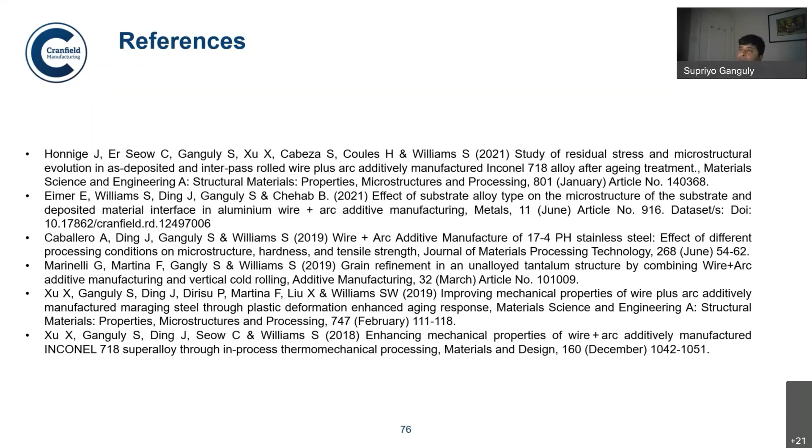Rolling is quite a complicated process, so we are now studying peening—ultrasonic peening as well as machine hammer peening—all robotic approaches that we are trying to implement in order to generate the necessary microstructural modification that we obtain from cold rolling.

We have a large WAAMMat program, and Professor Stuart Williams is our chair at the center. These are all our students, now working as research fellows or in different places, and their work is basically shown here—this work is ongoing.

So thank you for listening, and if you have any questions, please let me know.

Dr. Ganguly, thank you so much for the detailed presentation and detailed work in the field of WAAM. We are amazed to see the high-end infrastructure at Cranfield University, the building and the facility—the WAAM setup is really wonderful.

You mentioned about thermal mass—it increases with the deposition and so on. Thermal mass is a critical factor because, as you rightly said, it controls the microstructure and thereby the mechanical properties. So do you think there is any possibility, or if the possibility exists, how to real-time monitor the process and control the process parameters in real time?

How difficult it is—yeah, the majority of the research is now focused in that area, on how to control the cooling rate of a deposit. I've just been the internal examiner of a student called Alex, who actually did some really good work. What is happening now is we are trying to use wavelength-corrected pyrometers to accurately measure the weld pool temperature, and from there we try to control the deposit parameters.